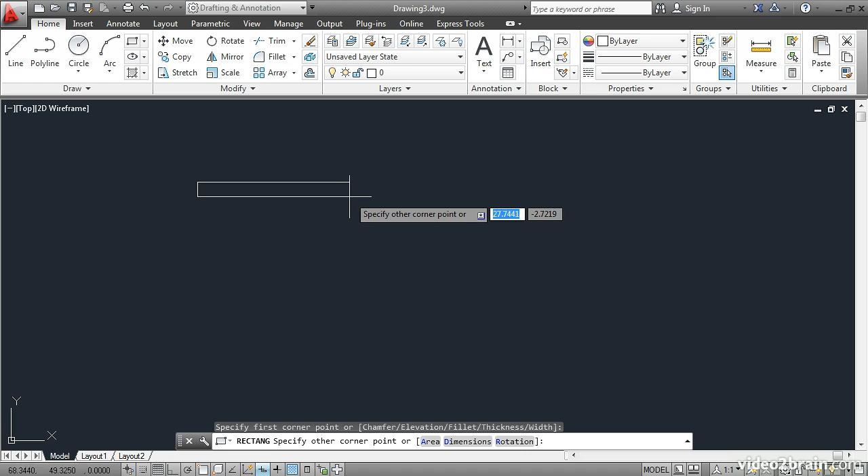Both the rectangle and polygon tools are located here in the flyout on the Draw panel. Let's start with the rectangle tool. It says specify first corner point, or there's two different coordinate values there. Now I'll click a point and watch what happens when I move the mouse. If I move it to the right, the left coordinate seems to change, and if I move it up and down, the right coordinate changes more.

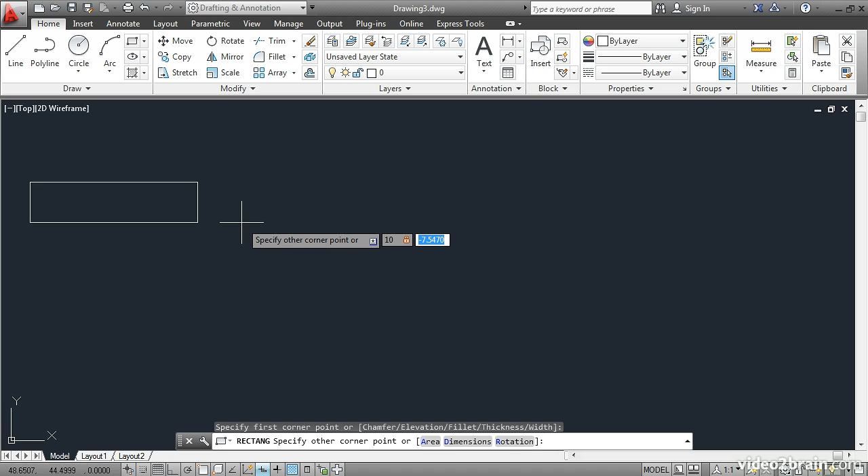This indicates what we're looking at, the x and y axes. So the first number is the x-coordinate, and I'll type in a number. Let's try 10. I'll press Tab to enter the second value, which is the y-coordinate. And here I'll type in 5 and press Enter. So I've succeeded in drawing my first rectangle that's 10 units in length and 5 units in width.

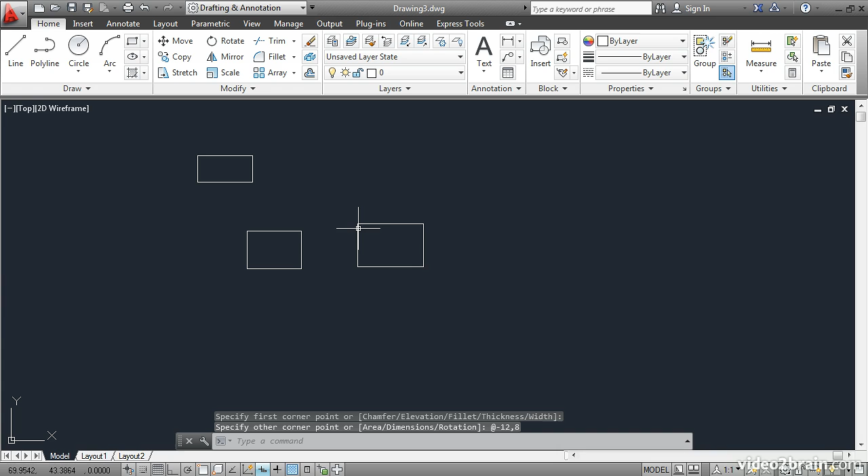Let's try that again. Rectangle, click a first point, and then click a second point. So you can do it freehand like that, or you can use numbers. I'll draw a third rectangle. This time, let's say we want the rectangle to go over this way. So we'll have to specify a negative x-coordinate because it's to the left of the initial point. So I'll type in negative 12, Tab, and then positive 8. Enter. So the rectangle went this way in the negative x direction and up in the positive y direction.

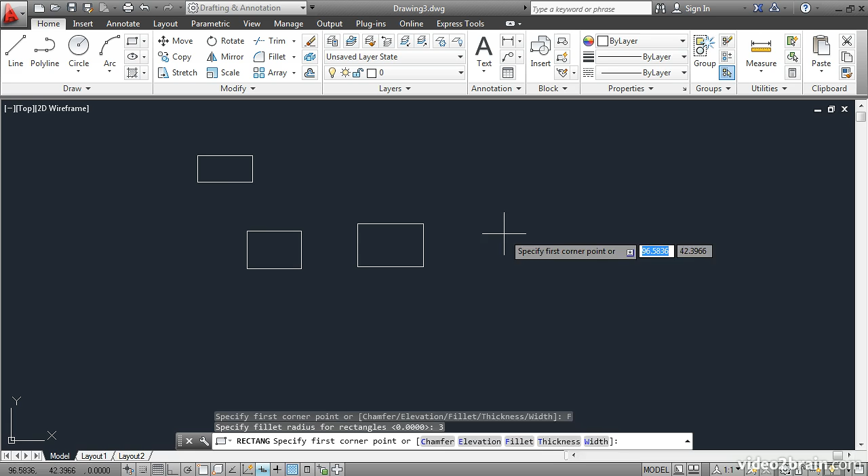Let's try another one, but this time we'll use one of the options. I'll click Fillet, and I'll specify a fillet radius of 3, and then I'll press Enter. Then go ahead and specify the first corner point, and as I move the mouse you can see what's happening. The fillet is a radiused transition between the perpendicular edges of the rectangle. Again, we can specify the dimensions of this rectangle if we want. I'll type in 25, Tab, minus 15, Enter. You can see right here what it entered, at 25, minus 15. You can do that on the command line if you're not using dynamic input.

I'll turn that off. Let's try another rectangle. I'll click a point here and type at 15, negative 8. So it made the rectangle 15 units in length and 8 units in width, and it went down from the initial point because I used a negative y coordinate. Now, you may have noticed that the last rectangle that I made automatically came with the same fillet radius that I specified earlier. If you want to clear that out, you have to create yet another rectangle and click on Fillet, and then specify the fillet radius as 0, and that will get rid of that curve.

This time let's try a chamfer. I'll click that option, and chamfers work as beveled edges, and they're specified with 2 different dimensions. Usually those dimensions are the same, but they can differ. Let's try 2 for the first chamfer distance and 2 again for the second chamfer distance. Now I'll go ahead and draw the rectangle, and you can see what's happening here. I have beveled edges based on those 2 dimensions that I entered. I'll click to set the opposite corner point. So the first dimension is this length, and the second chamfer dimension is this width.

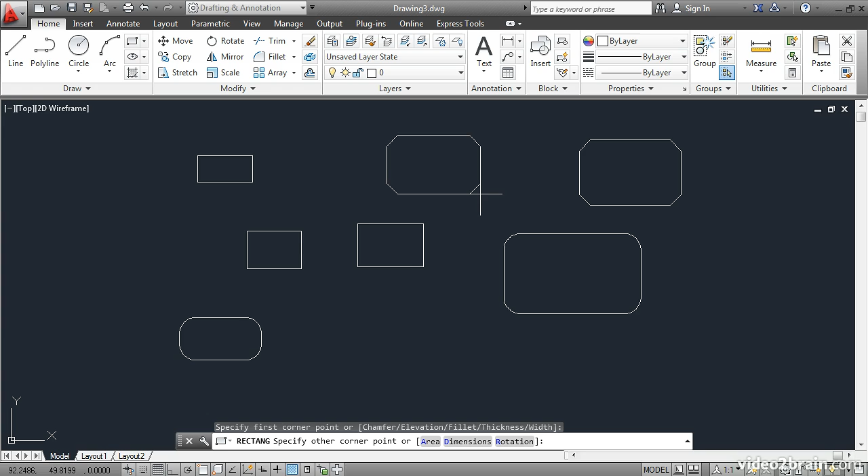Again, if I want to create another rectangle, it will have those chamfer values still in the rectangle command. So I need to clear those out if I don't want to use that. Let's try again. Rectangle, chamfer, 0, 0 again, Enter. Now I've cleared those values out. I'll click a point and click again, and our rectangle command is back to normal, if you will.

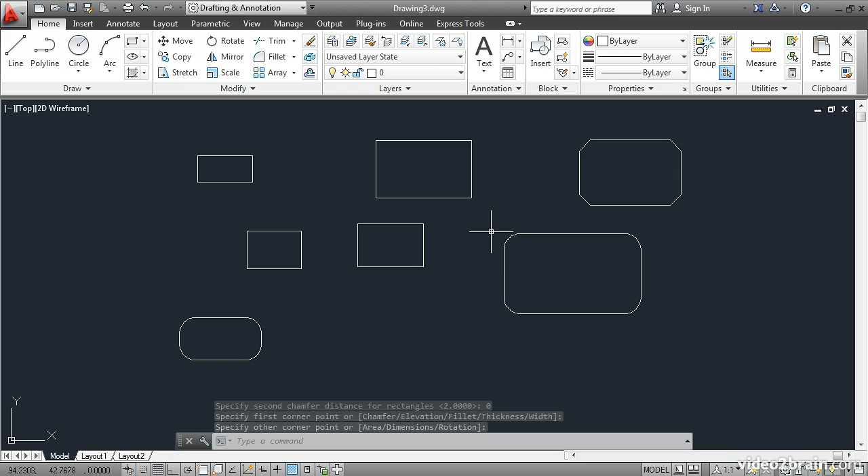Now I'll pan over to the side, and let's draw a circle of arbitrary size. Now you don't necessarily need to have a circle, but this will illustrate the point I want to make in regards to the polygon tool. Go up to this flyout and choose Polygon from the flyout menu. And then on the command line it says Enter number of sides. I'll say 4, Enter. Specify center of polygon or edge. I'd like to specify the center of the polygon at the center of this circle. So for that I need to use Object Snap. Hold down Shift, right-click, and choose Center. Click on the circle's edge to snap to the center of the circle, which is highlighted in green.

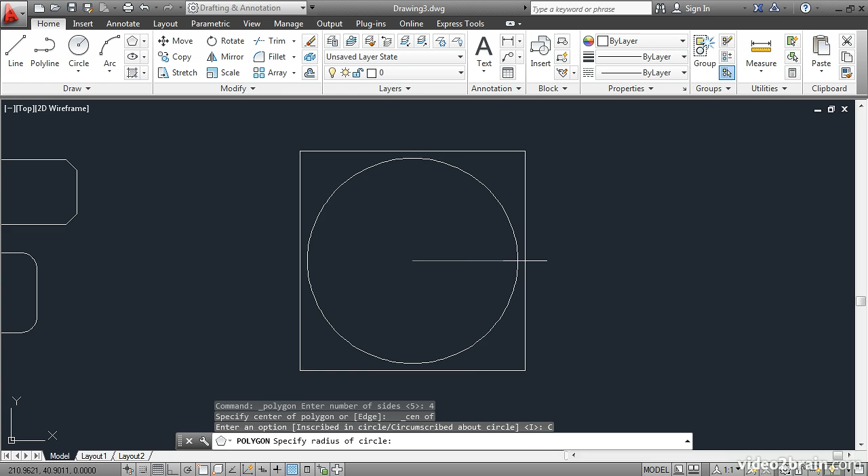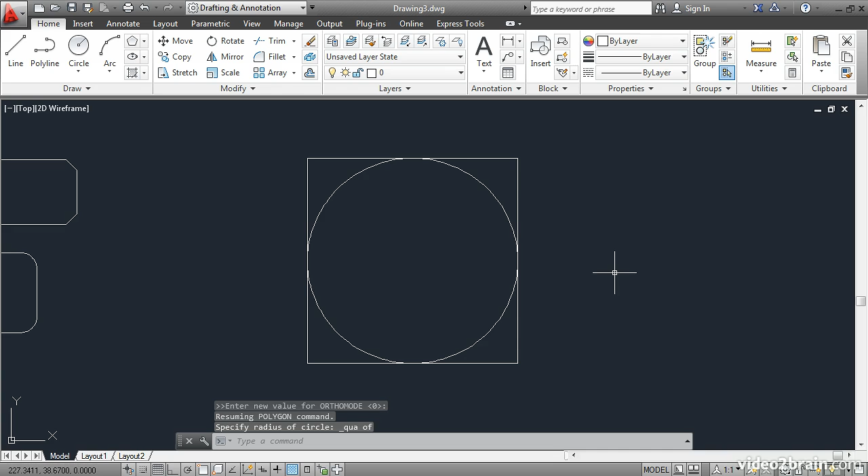Now it gives me two different options, Inscribed in Circle or Circumscribed About Circle. Let's try Circumscribed About Circle. Here you can see that I can draw this square around the outside of the circle in this way. I'd like to snap it so it's precisely the same size as the circle. So to do that, I need to snap to the quadrant point of the circle. Hold down Shift, right-click, and choose Quadrant. Its icon indicates what a quadrant is. They're the cardinal points of any circle or arc. So I'll click here on this east quadrant to specify the radius of the circle. And now the polygon is complete.

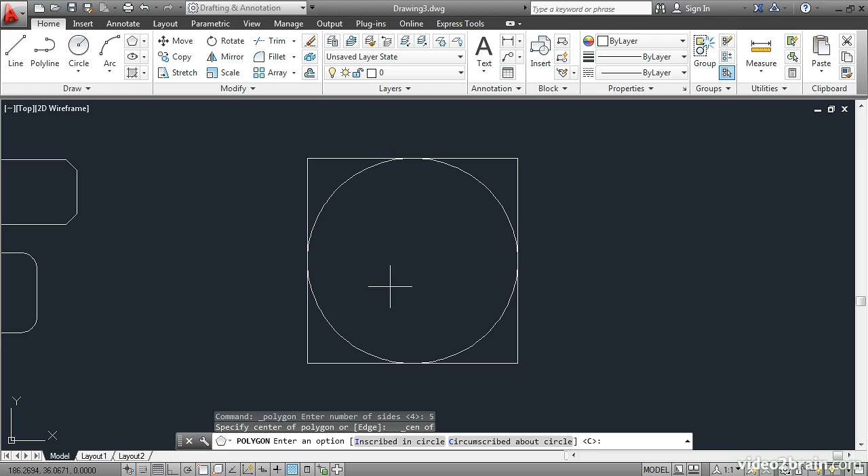Let's try that again, but this time we'll do it inscribed within a circle. And we'll use 5 sides. I'll specify the center point by holding down Shift, right-clicking, and choosing Center. I'll click on the edge of the circle to specify the center of the polygon, and then I'll use Inscribed in Circle, and I'd like to snap it up here, so I'll hold down Shift again, right-click, and choose Quadrant, and click right there. Now we have a pentagon perfectly inscribed within the circle.

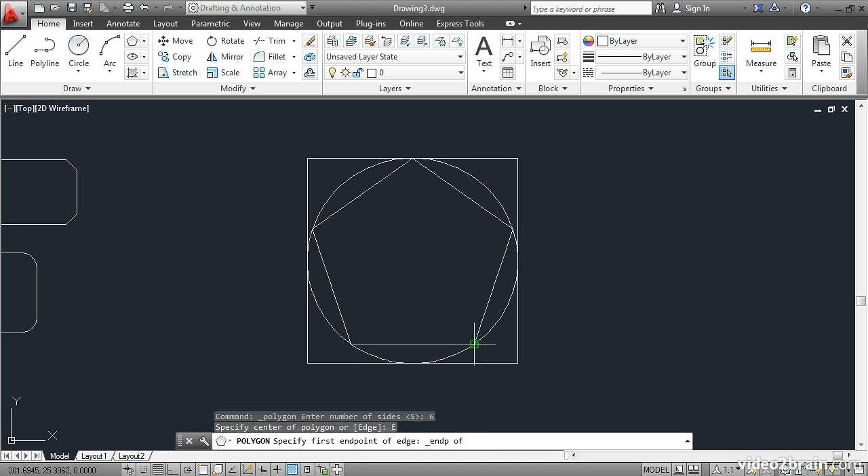There's one other creation method for the polygon tool. That's the Edge method. Let's try this. Click on Polygon. Let's set the number of sides at 6, and then we'll use the Edge option. The first endpoint of edge, let's say it's snapped to the endpoint of this pentagon. The second point of the edge will be snapped to the endpoint of this corner. Now we have a hexagon bonded to the pentagon along their mutual edge.

You have learned how to create rectangles and polygons and explored many of their creation options.